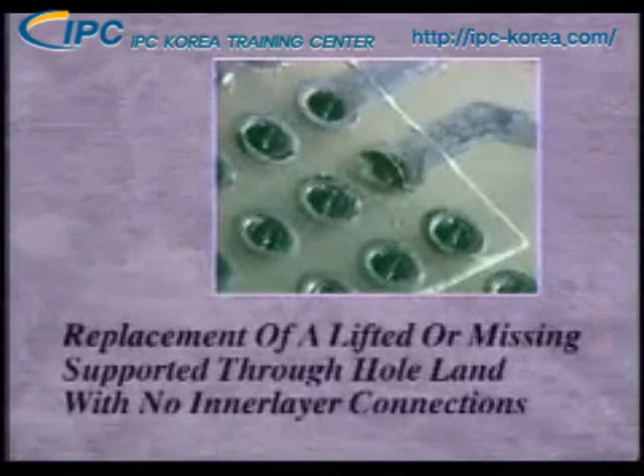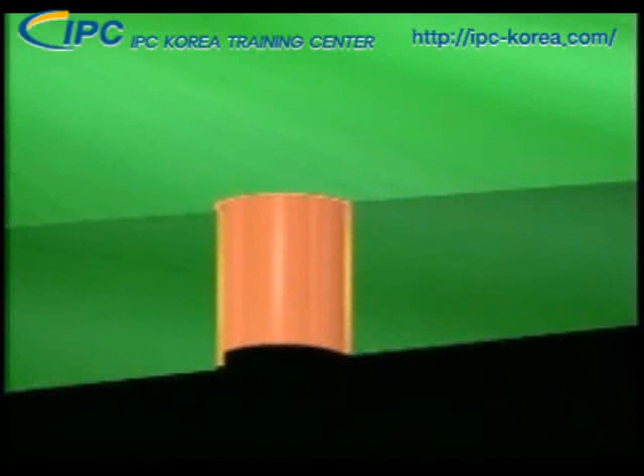The subject of this program is the replacement of a lifted or missing supported through-hole land with no inner layer connections. A supported through-hole is one in which the hole is plated or coated with a metal lining around the inside of the drilled hole wall or barrel. Supported through-hole lands sit at the top or the bottom of these metal-plated holes.

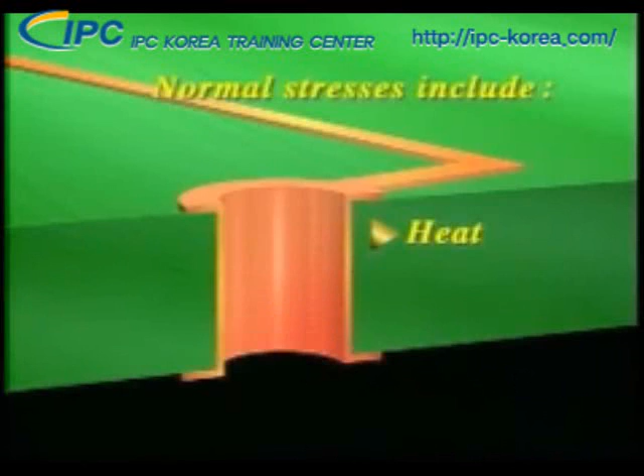The plating extends through the hole to the lands at the top and bottom, forming one continuous metal mass. The lands and the plating are connected in two ways. First, mechanically, meaning there is a physical connection between the lands and the plating, strong enough to withstand normal wear and tear of electronic products. Second, electrically, as the lands and plating are parts of the same circuit.

Any time a land is torn away from the plating, the mechanical and electrical connections between the land and the plating are damaged and should be restored. The method for restoring these connections is to replace the old plating with a device called an eyelet. If you can see that the plating at the top, bottom, or inside the hole is cracked or chipped, the original plating should be removed and a replacement eyelet inserted. One exception is when a corner of a land is lifted and the plating inside the hole is undamaged. Assuming the land can be reused, the lifted portion can be rebonded to the board surface using the dry film rebonding technique learned earlier in this repair series.

The eyelet insertion procedure can be used on single-sided, double-sided, and multi-layer boards. However, unless you have special training, you should not use the eyelet insertion procedure on certain types of plated through-holes. Multi-layer boards have two types of plated through-holes: those with internal electrical connections and those with external electrical connections, or surface conductors only.

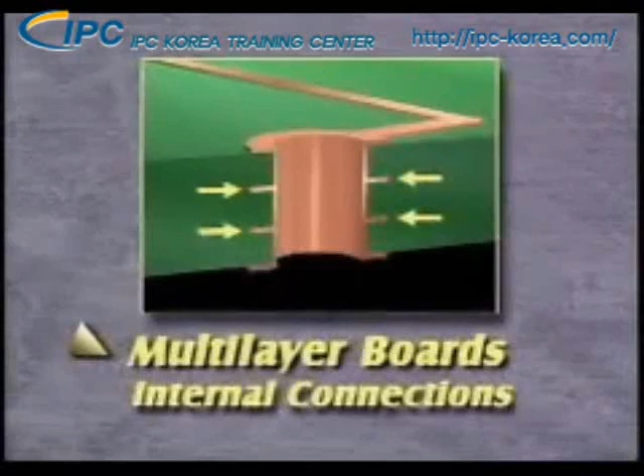An inner layer connection is one where the connection to the plated through-hole is made inside or below the surface of the board. Eyelet insertion on a plated through-hole with internal electrical connections is a complex procedure and is not described in this tape. We will only cover the eyelet insertion procedure for plated through-holes with external surface conductors.

Let's begin the repair process with an analysis of the damage. When analyzing plated through-hole damage on multi-layer boards, first check for inner layer electrical connections. The most reliable method for discovering if there is an inner layer connection is to review the engineering schematics, sometimes called the artwork, for that particular multi-layer board.

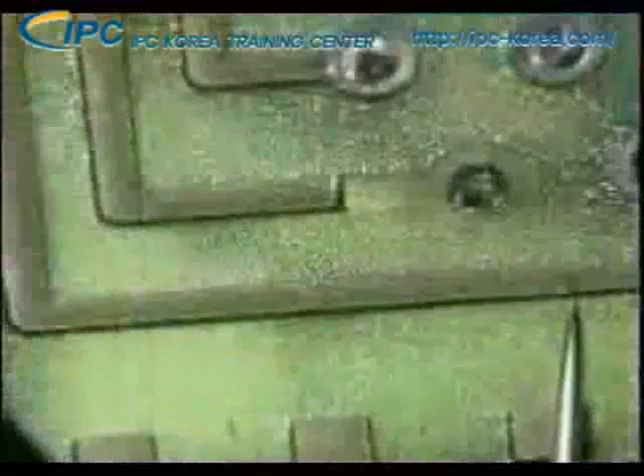Next, look for board damage and repair it if necessary. If the land is partially lifted, check to see if the plating around the inside of the land is cracked, chipped, or separated from the land. If the plating has been damaged, proceed with an eyelet replacement.

Now let's begin the actual repair work. We'll start by cleaning the repair area, then remove any contamination or solder masking if necessary, and clean the area once again. Next, we'll select a replacement eyelet.

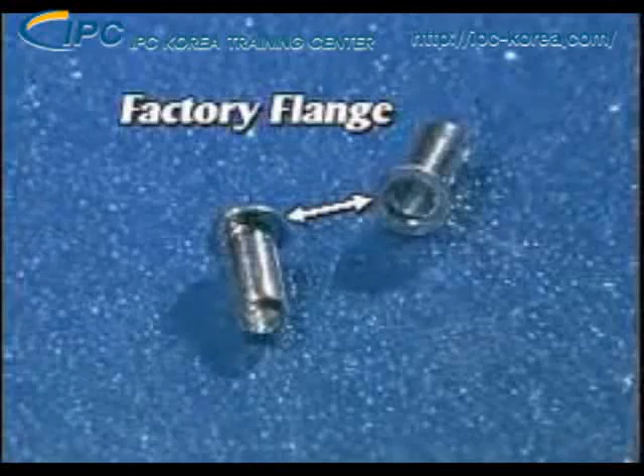Most eyelets come from the manufacturer with a flattened surface on one end called a flange. We will call this prefabricated flange the factory flange. A technician makes the second, non-factory flange by flaring and flattening the material that sticks through the other side of the hole after the eyelet has been inserted.

The selection of the replacement eyelet requires some simple math. To do the math, you have to make several measurements. We'll explain what these measurements are now. All measurements can be made in the metric system, centimeters, millimeters, etc., or in the English system, inches, feet, etc. For this program, we will use the English system.

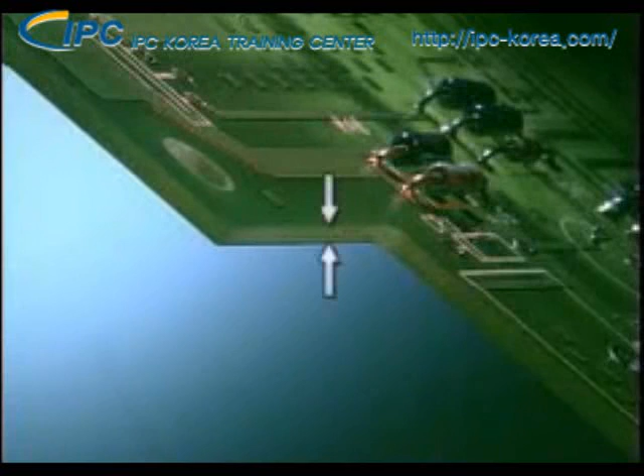The first measurement that must be made is the overall thickness of the board. Board thickness is measured in thousandths of an inch, or mils. If a board is measured at 62 thousandths of an inch thick, you may hear the term that the board is 62 mils thick. Next, we'll look at the inside diameter, or ID, of the replacement eyelet.

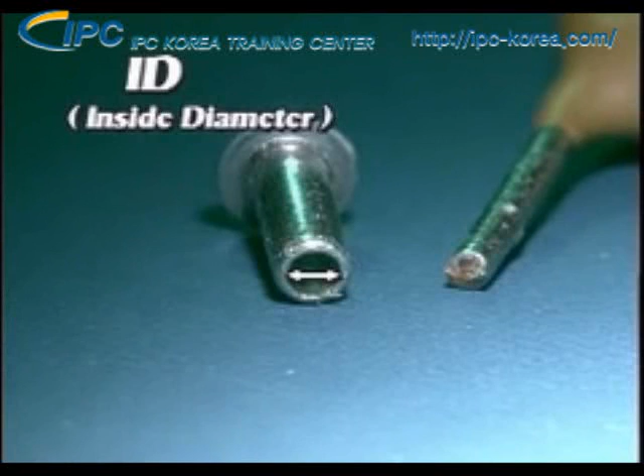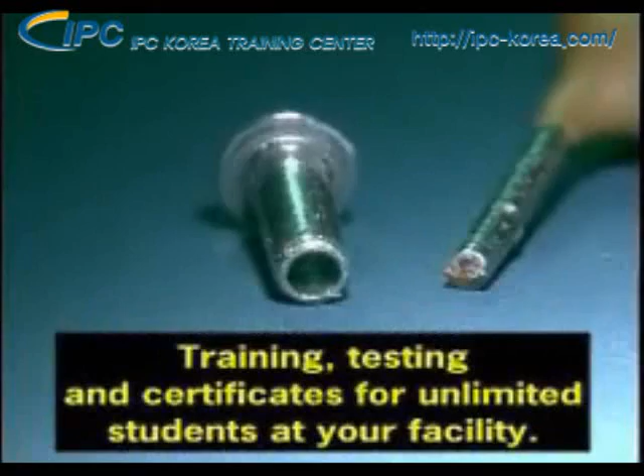The eyelet diameter should always be between 3 thousandths and 20 thousandths of an inch greater than the diameter of the component lead that will go through the eyelet. In other words, the inside diameter of the eyelet must be bigger than the component lead, but not too much bigger. Another critical measure is the length under the flange, also called the LUF.

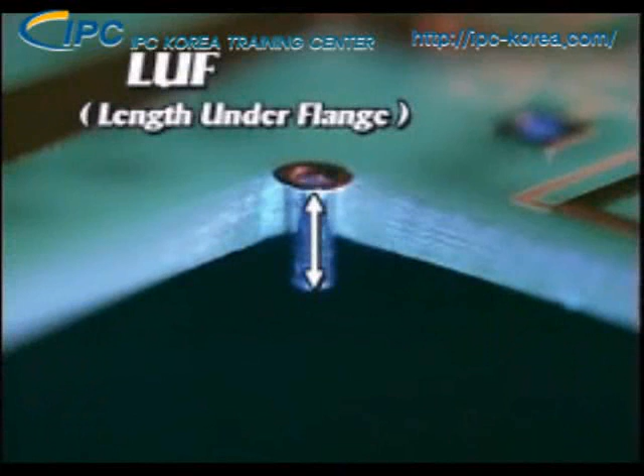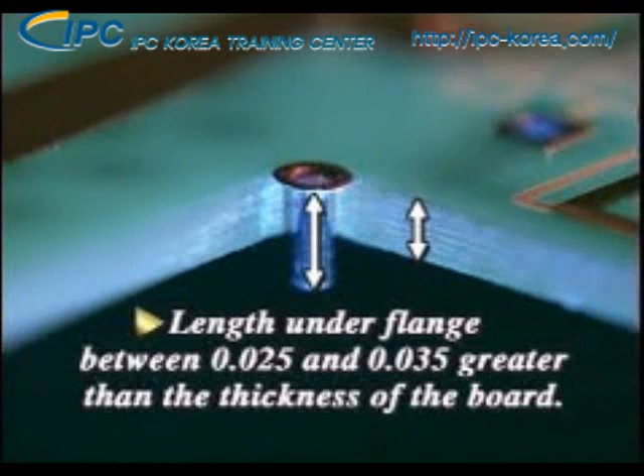This is the total length of the eyelet minus the thickness of the factory flange. This length should be between 25 and 35 thousandths longer than the thickness of the board. The protruding portion will be flattened or swaged to form the flange on that side of the board. In other words, the inserted eyelet needs to stick out of the board enough to create a flange.

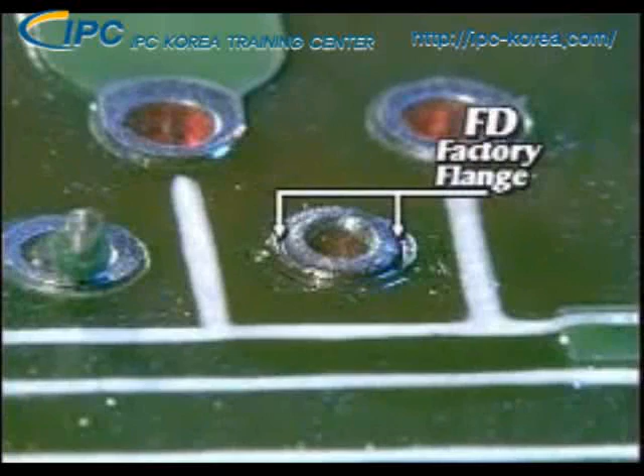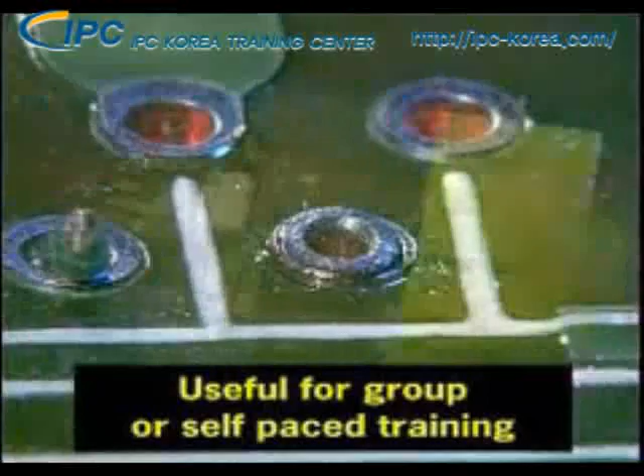FD is flange diameter, or the width of the factory flange. The eyelet's factory flange diameter should be slightly smaller than the land it sits on to provide for an acceptable solder fillet. Acceptable solder fillets are described in IPC's publication A610, Acceptability of Electronic Assemblies. This specific information can be found in the section on soldering.

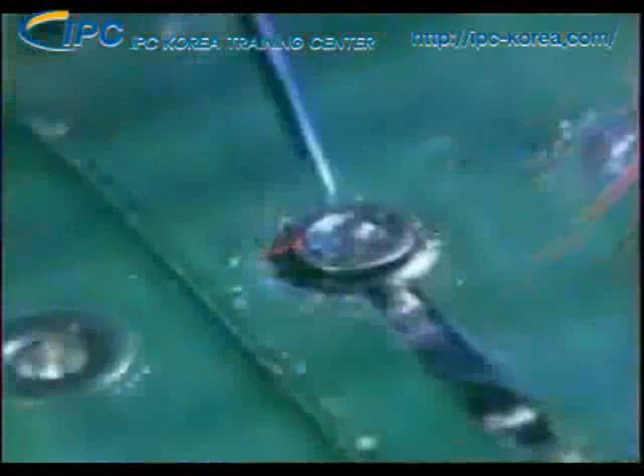The next measurement is called the outside diameter of the eyelet, or OD. The hole that the eyelet goes into can be between 1 and 5 thousandths larger than the eyelet's outside diameter. The hole should be big enough to allow the eyelet to be inserted without force, but small enough so that the eyelet fits snugly. Not too tight, not too loose.

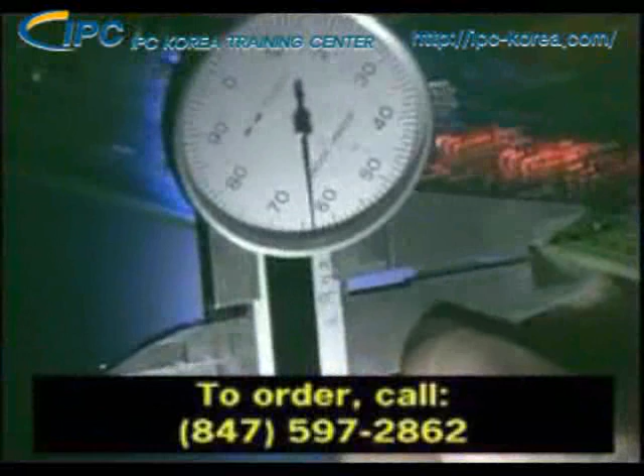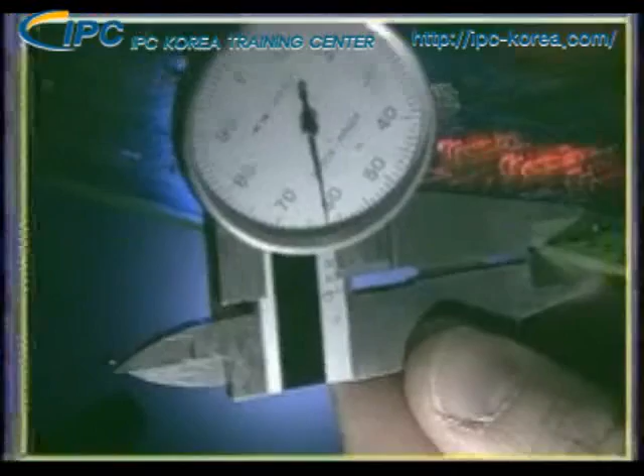Let's review an example to show how a typical eyelet is selected. The first step is to measure the thickness of the board using a dial caliper or a micrometer. Place the board between the jaws of the caliper or the measuring faces of the micrometer and move the ends together until they lightly touch either side of the board. Then check the reading. For the sake of our example, let's say that we have measured a board and it's 62 thousandths or 62 mils thick.

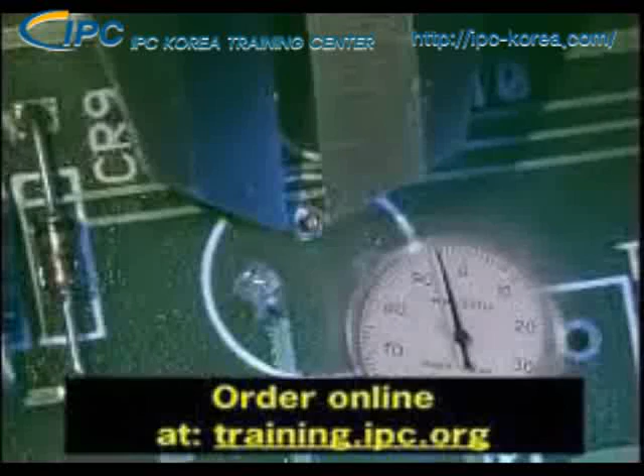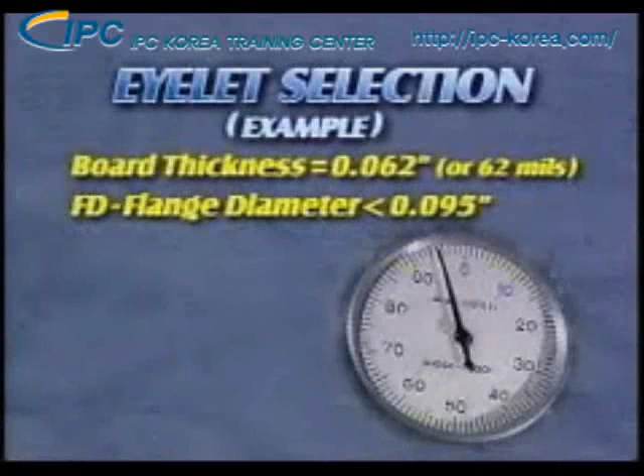Now let's find the flange diameter measurement. To get this measurement, locate one of the other undamaged holes that the through-hole component used. This is sometimes called a sister or companion hole. We'll measure the diameter of the land above the companion hole. The preferred diameter of the factory flange on your replacement eyelet should be slightly smaller than the companion hole's land. It can't be any smaller than the hole in the board or the eyelet would fall out. It also can't be so large that it interferes with the minimum spacing requirements of nearby circuitry.

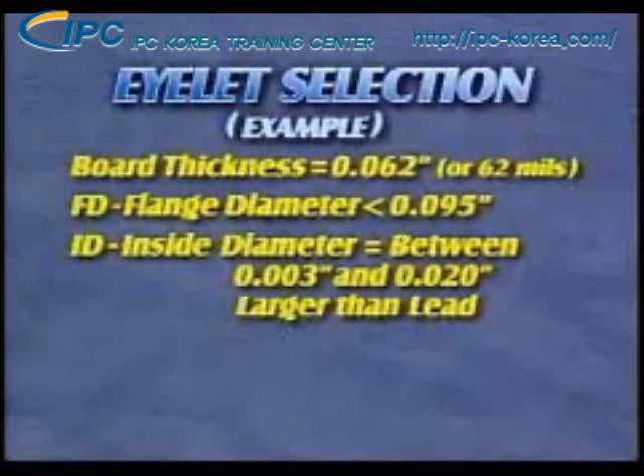For our example, the component hole's land measured 95 thousandths in diameter. Now we need to find the inside diameter of the replacement eyelet. As mentioned earlier, a correct amount of space between the component lead and the eyelet wall is within the range of 3 to 20 thousandths.

The eyelet ID has to be large enough to leave space between the component lead and the inside wall of the eyelet. This space will allow solder to wick up through the eyelet all the way to the top of the hole. However, if the space between the side of the lead and the inside wall of the eyelet is excessive, the molten solder won't stay up in the barrel. It may just flow back down, or cause pits, voids, or insufficient solder coverage.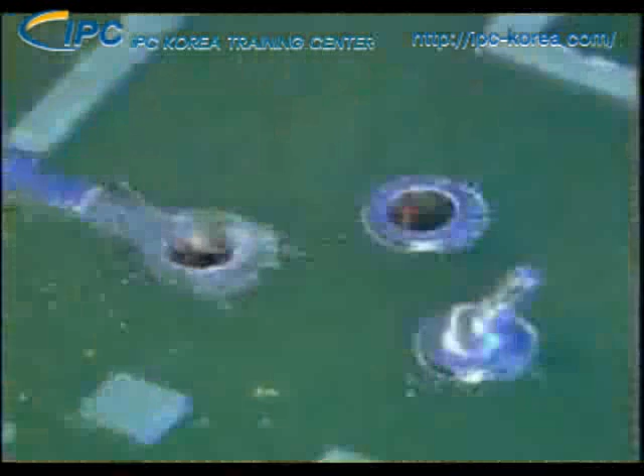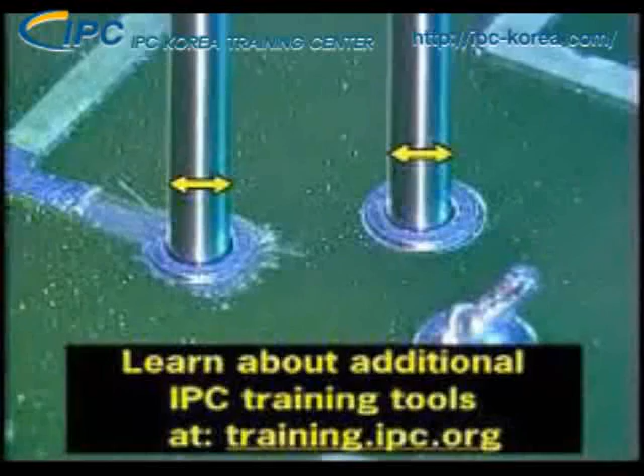A typical method for a technician to measure the ID of an eyelet is to use a set of pin gauges to measure the inside diameter of a companion hole's barrel. We know that the inside diameter of our eyelet must be very close to or the same size as the inside diameter of the companion hole. Remember that the leads of the replacement component that will go in both holes are the same size. So, for the sake of our example, let's say that the ID of the companion hole is 40 thousandths.

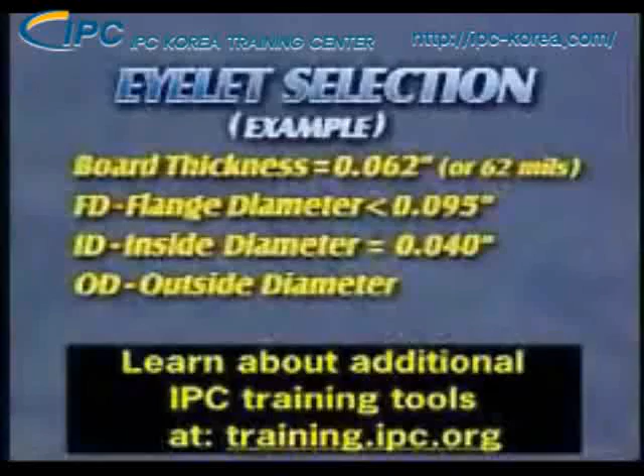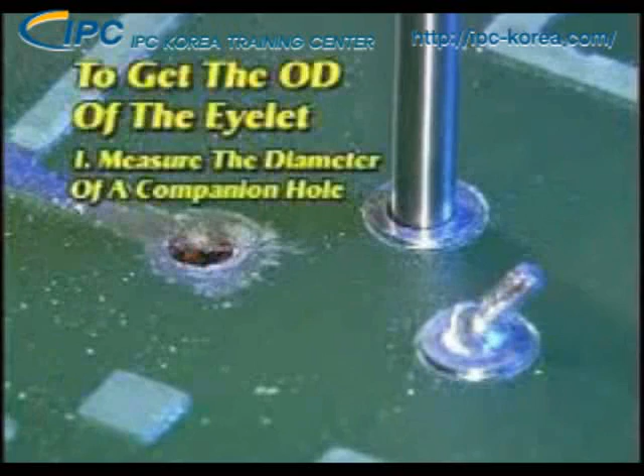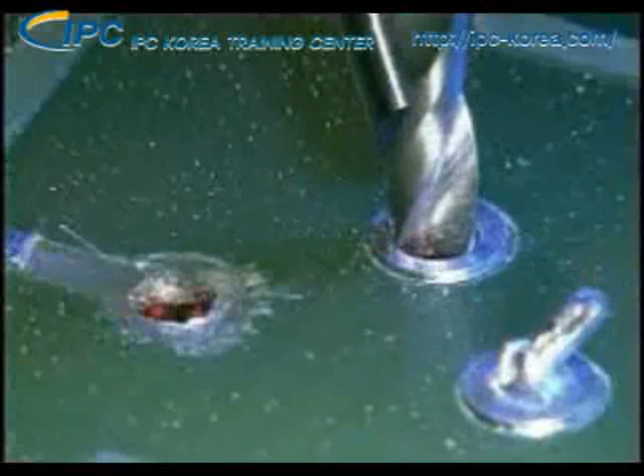The next measurement we need to find is the OD, or outside diameter of the eyelet. To find this measurement, you must know the diameter of the hole that the replacement eyelet will fit into. The diameter of the hole will be the same size as the diameter of the drill bit or the ball mill you use to ream out the hole. Remember that in order for the component lead to fit into the repaired hole, we must grind all of the damaged plating out of the hole.

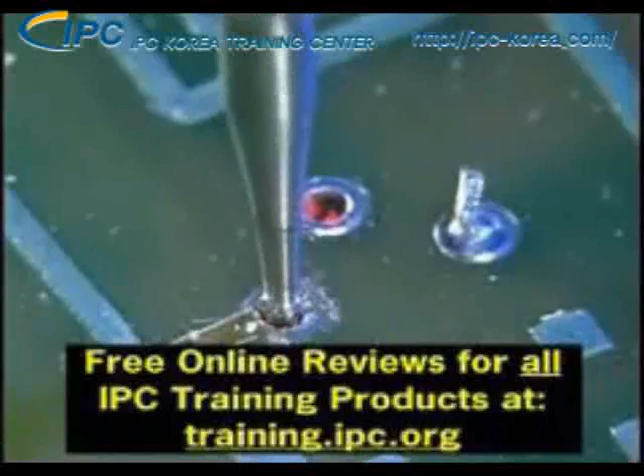So we'll select a ball mill or drill bit that is slightly larger than the measurement of the companion hole's diameter. This slightly oversized mill or drill bit will grind out any remaining debris in the damaged hole. However, the bit or mill should not be so large that it digs into the board's material behind the plating. The diameter size of a bit is stamped on the shank or the part that is inserted into the chuck of the drill motor, or on the drill bit holder. It's always a good idea to double check the diameter of the bit or mill with your caliper.

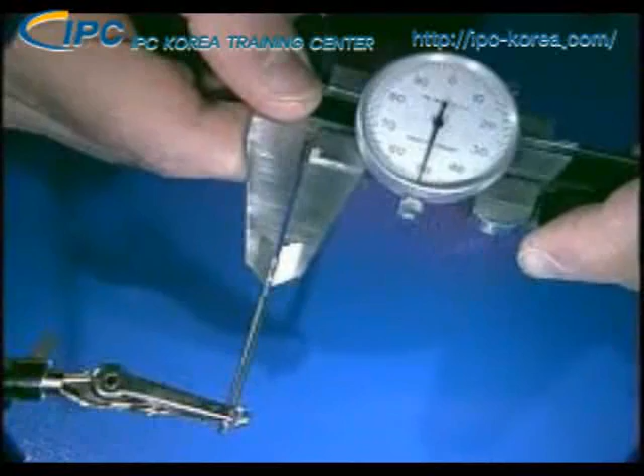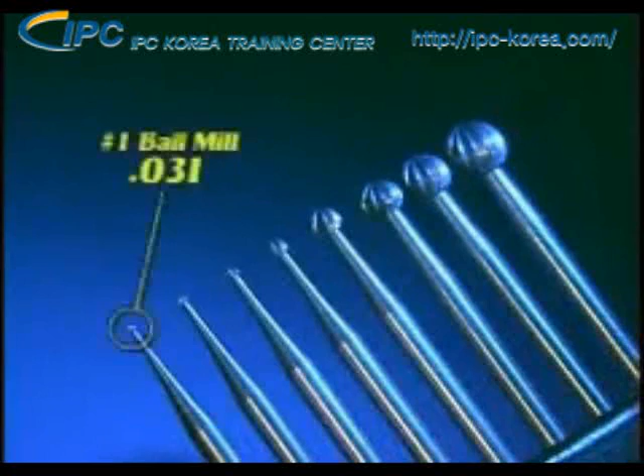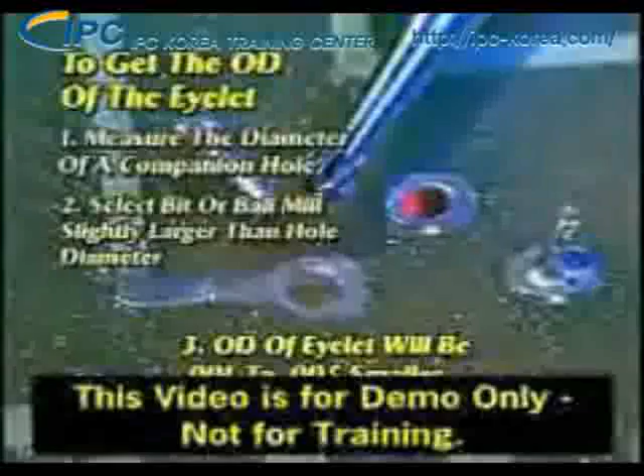Ball mills come in sizes from number 1 to number 8. Each number corresponds to a diameter size. For instance, a number 1 ball mill is 31 thousandths in diameter. A number 5 is 63 thousandths. The outside diameter of the replacement eyelet must be 1 to 5 thousandths smaller than the reamed out hole. This will allow the eyelet to be inserted without force but not rattle around inside the hole.

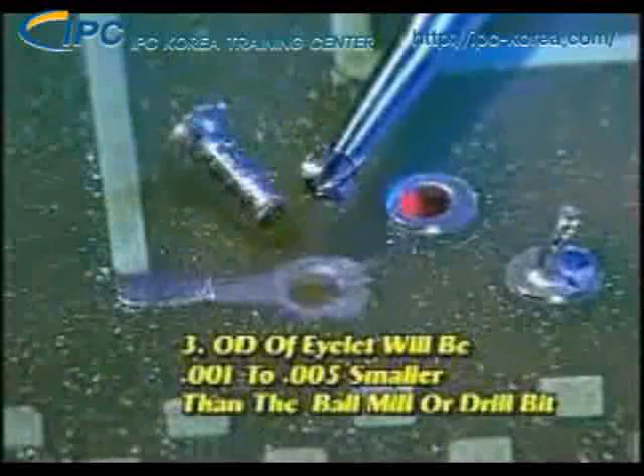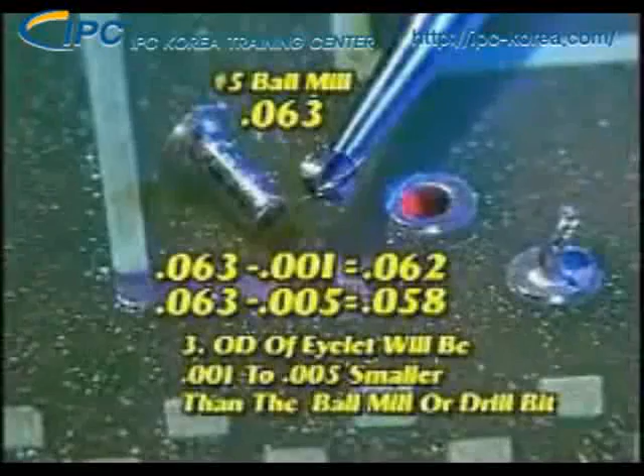For this example, let's say that we'll use a number 5 ball mill. A number 5 ball mill is 63 thousandths in diameter. To find this outside diameter of the eyelet range, we'll take .063 and subtract .001 and get 62 thousandths. Then take .063 and subtract .005 and get 58 thousandths. The range for the outside diameter of the replacement eyelet is between 62 and 58 thousandths of an inch.

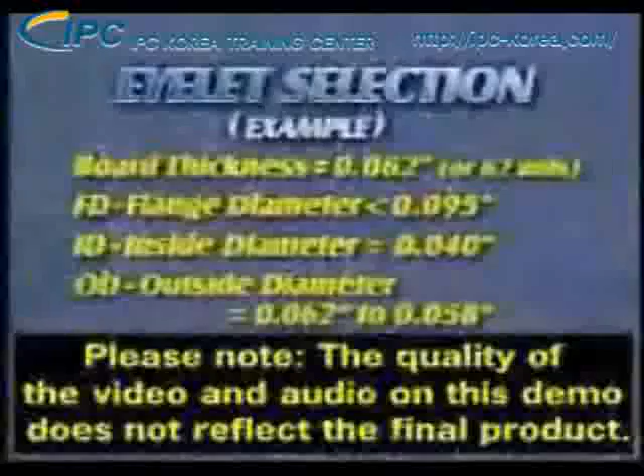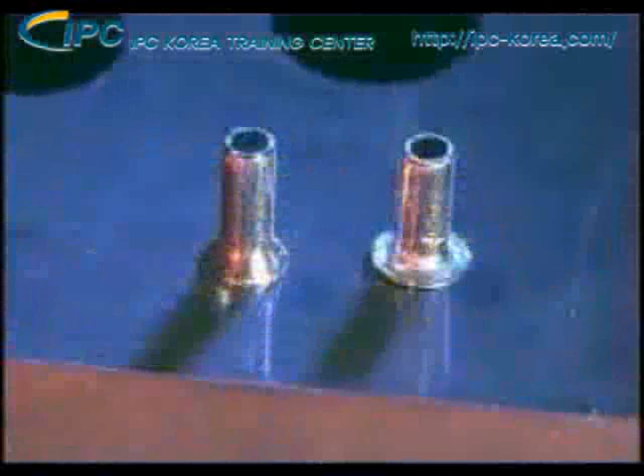Let's continue with our example for selecting a replacement eyelet. The next measurement to make is the length under the flange, or luff. The luff needs to be 25 to 35 thousandths greater than the thickness of the board. This will give us enough extra material to make a proper second flange. Remember that the board thickness was 62 mils, or 62 thousandths.

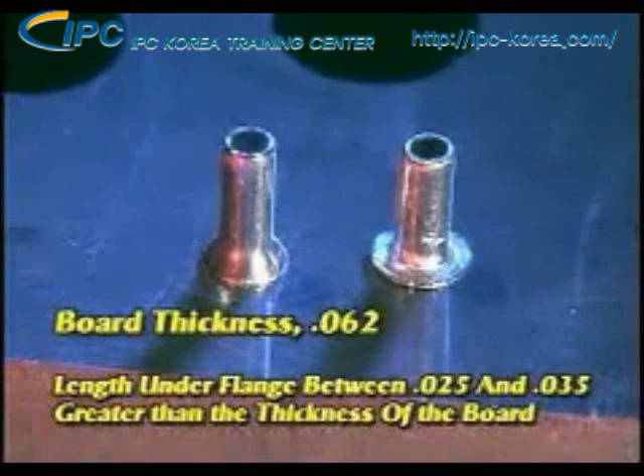To find the luff, first add .062 to .025 to get 87 thousandths. Then add .062 to .035 to get 97 thousandths.